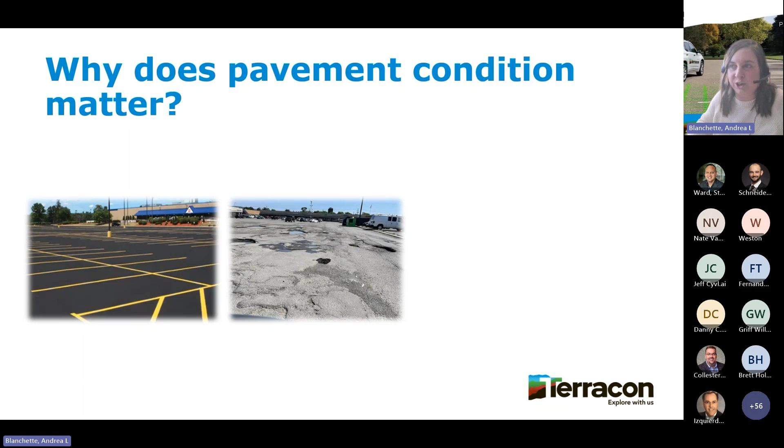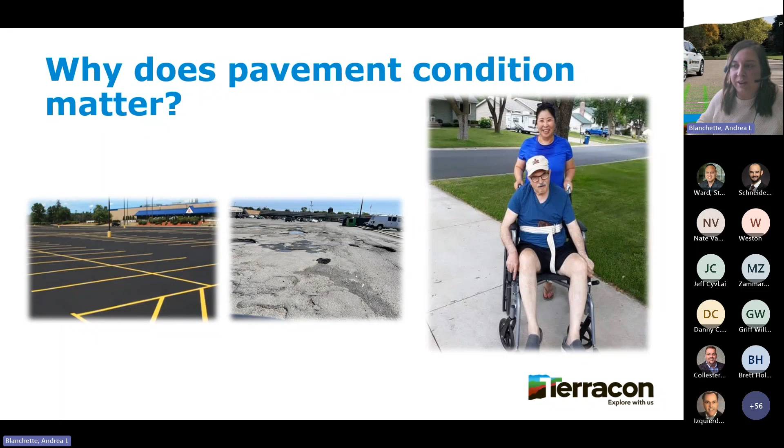So these potholes can have real life consequences. I'm not just making this up, but this can affect people's livelihood and ease of access to a site. So we want to eliminate that for users and make sure that the parking lots are performing and are safe for people using that. Pavement condition can also matter in terms of sustainability.

Can everyone hear me? I see someone lost the sound. I'll keep going unless someone... Steve, am I good? I can hear you. Okay.

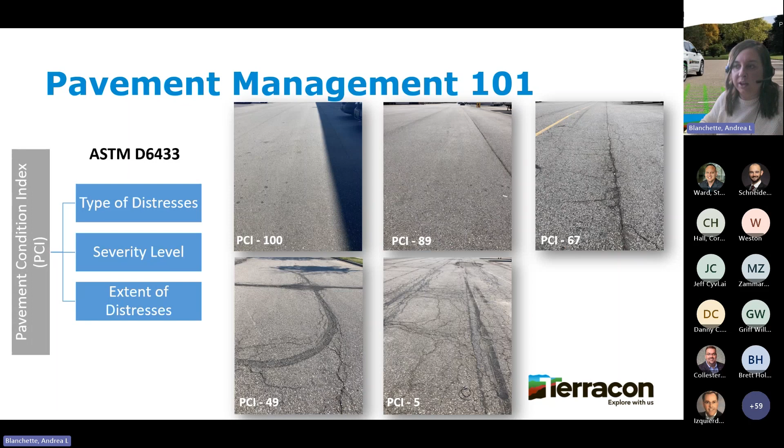And as facility managers, you can kind of use that guide to dictate where you're comfortable at. We have clients that set a high aesthetic standard and they want their PCIs maintained upwards of an 80. That's totally fine. That comes with a cost, right? So it costs more money to maintain at a higher overall PCI average, but maybe a 49 isn't realistic for you. You've got a lot of complaints from users, or there's a lot of risks or safety issues happening at a PCI that low. So you can really guide and set your average target value there and work to maintain your network at that level.

We use the PCI numerical data to attribute this to different types of maintenance. So gone are the days where it's just build a pavement, at year 15 mill and overlay, and then wait till you reconstruct it. There are a ton of tools in the toolbox for both concrete and asphalt pavements, whether it be surface treatments like microsurfacing, a fog seal, chip sealing, different reclamation, reconstruction of a pavement, full depth repair type work. So again, different states have different contractors that specialize in different processes, but there's a lot of options for repairing a pavement that can really save clients money.

Just for a quick example, something like a fog seal might be done in a really hot climate area like Phoenix. We don't do these a lot in the Midwest and Minnesota specifically.

Picture a brand new dark asphalt pavement, right? It's jet black and it bakes in the sun all day. A fog seal is a thin asphalt emulsion that is sprayed on the surface of the parking lot and prevents that top surface of the pavement from oxidizing and becoming brittle, which leads to little micro cracks that form, which is the gateway to water infiltration of the pavement, which leads to more robust cracking. I like to equate a fog seal to sunscreen. You put sunscreen on your skin so you don't bake out in the sun, similar to that application.

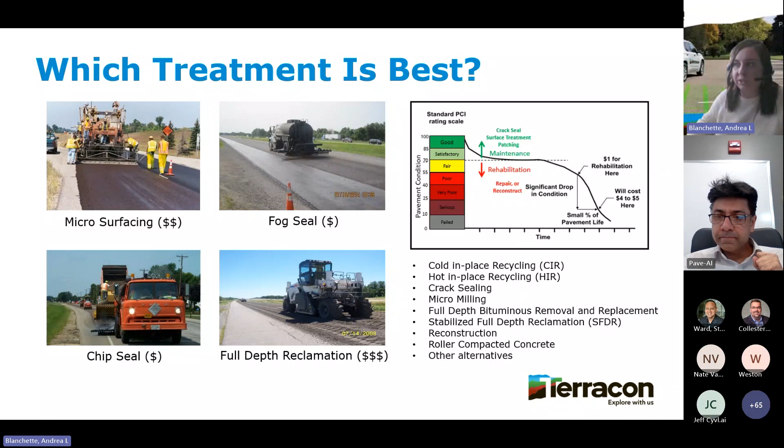So hopefully that's a quick summary on the data collection aspect. I mentioned that we used to do these manually. We'd send out a technician and collect all of this data. I'll welcome Amit to join me here, and we're going to transition into some of the technology we're using and show you the way we're using machine learning, AI, and video capture to do these pavement assessments. So to start, I'd like Amit to share his story and how his team got into working with pavements. Amit?

Thank you, Andrea. I am on the mic. Hopefully you can hear me, but my camera is not turning on, it seems like. I could see you, Amit. Regardless, right. Yep, go ahead. Okay, great. Well, thank you, everyone. Great to be able to be on this and appreciate your time.

My name is Amit. I am with Pave AI, and what I am hoping to do is talk a little bit about the technology, give you some of our background and how we came to be in this arena, and talk through some of the issues that we see. So starting off with our background, it might surprise you, but we are not geotechnical engineers. We are not PEs. We're actually a bunch of aerospace engineers who build satellites for DoD. We use a lot of AI for looking at geospatial imagery and doing detection on board the satellite. So the obvious question is, why are a bunch of guys building satellites all of a sudden looking at potholes and pavement cracks?

The reason this works really well is Terracon has a significant amount of domain expertise in everything related to pavement and other areas, and a lot of data. So what we are trying to do is complement that capability with new technology in areas that, to use the overused cliche, are ripe for disruption. So that's where this marriage has been made. And Andrea, if you go to the next slide, I can start to talk specifics.

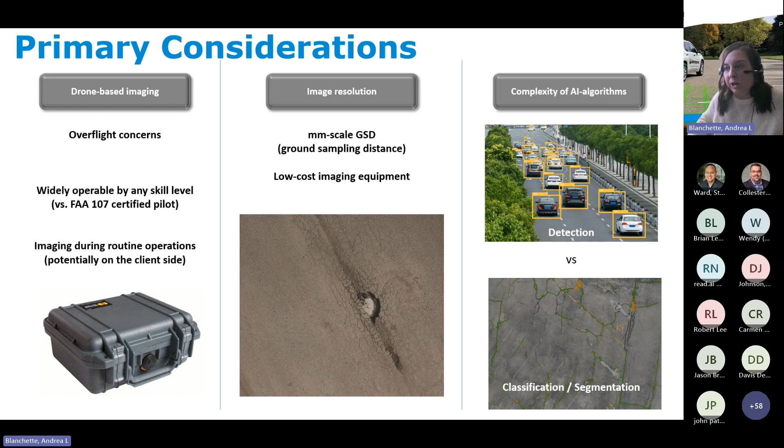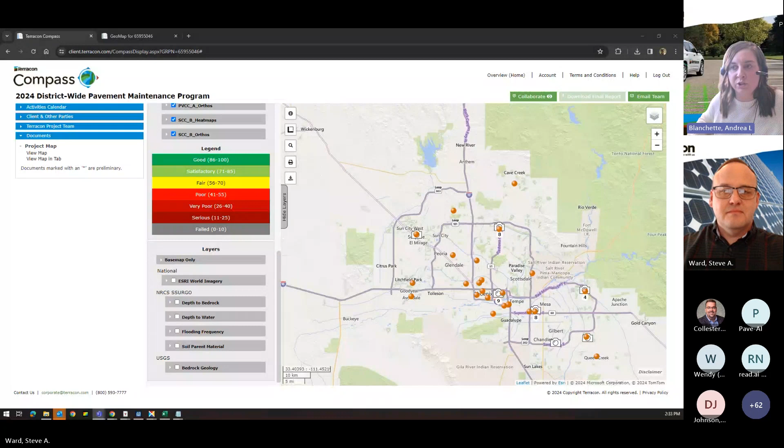I'm going to transition and welcome Steve to join me here. Steve is going to demo our Compass portal. This is how we've been delivering these PaveAI projects to our clients. It showcases the high resolution imagery as well as the PCI heat map that Amit was describing. So we definitely want to show you guys what this looks like.

The case study Steve is going to show is actually one of our longest serving clients. This is Maricopa Community College in Arizona. I just want to mention this is made up of 32 campuses, run by 16 different facility managers. It's 142 parking lots. It's about 16 million square feet of pavement that they manage.

So a lot of opinions with different facility managers and a huge amount of pavement that for over 25 years now, we've helped this client manage their pavements. And after Steve does this demo, I'll show you some of the reporting and results that we've got from them.

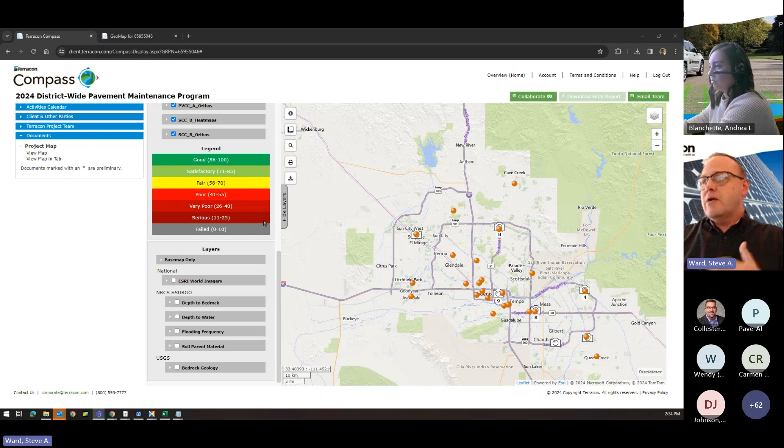This is a view of Compass, which is our digital delivery and consulting platform. So it's the same program that will deliver our geotechnical projects. You could see the borings underneath the surface or materials testing and see the compaction results and everything like that. So a powerful platform to see the project life cycle. But we're going to show you how we also deliver our digital products, such as PaveAI, in Compass.

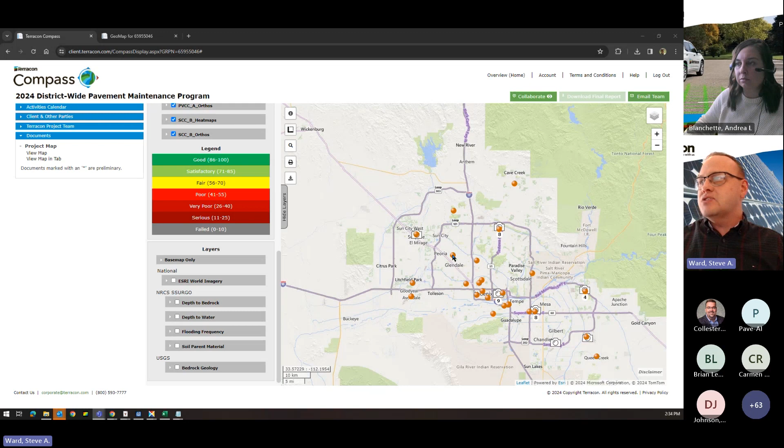This is a map of the various campuses for this client that Andrea mentioned, and I can just go ahead and zoom right in, or I could use the search and find a specific campus as well. But as I zoom in, you'll see that we start to see some map layers show up. And so that high resolution imagery that Amit was speaking of, that's gigabits of data, is presented through a web browser and lets you just zoom in and see bits of it at a time.

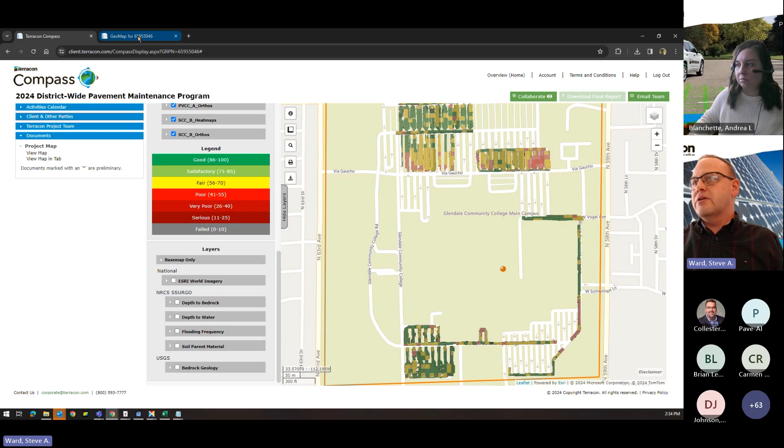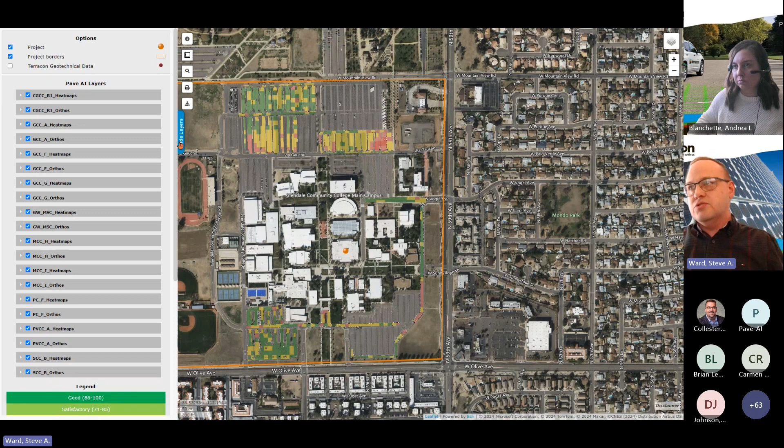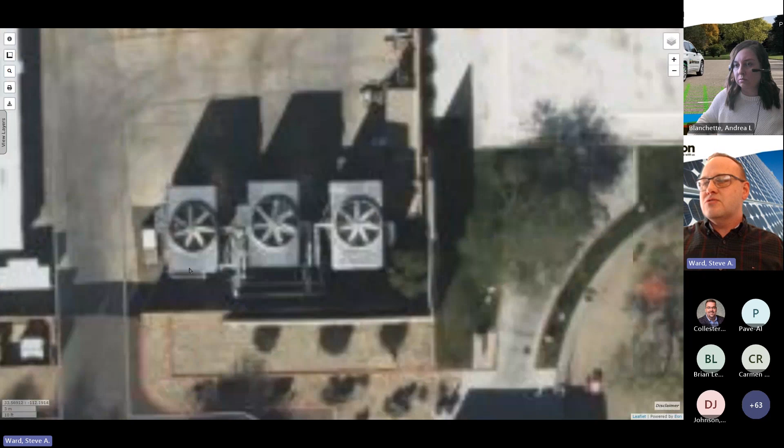You can click on view in a new tab and switch this over to aerial imagery and get a full screen. So I'm going to go ahead and do that now and show you a couple of things. One of the first things that Amit mentioned is the level of resolution that is needed to do this work. And to demonstrate this to you, I'm going to zoom in on these buildings, and you can see some air conditioning units here. As I zoom in to about this level, it starts to get blurry, and it's just going to get more blurry the more I zoom in.

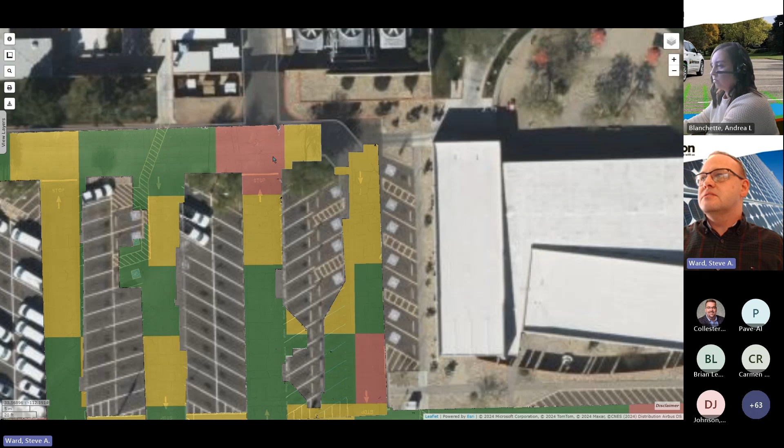However, where we have done the PaveAI imagery that you can see here with the color coding on it, you'll see as I zoom way in, we can get all the way down, and this will refresh here in a moment and show you that this is a sewer cover to access the area.

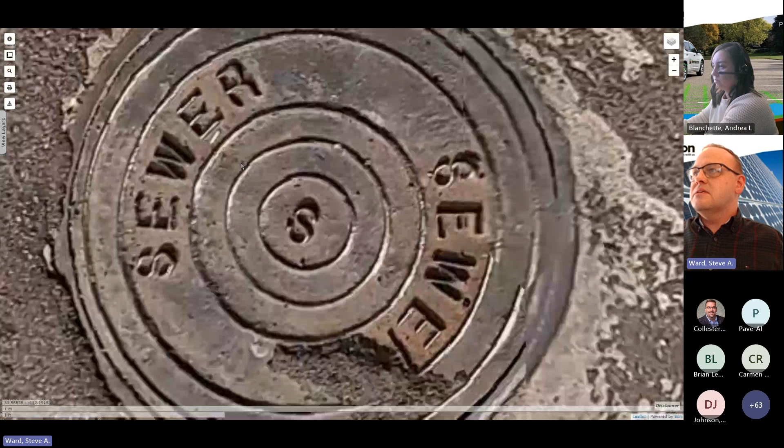You can see on the embossing the shadows from this as well. So that's how we're able to show this level of information, and Amit and his team are able to use this data and calculate through the AI those values based upon the flaws that are found. So I'm going to zoom back out here again and look at a larger area of the parking lot to kind of show you how the machine learning is calculating.

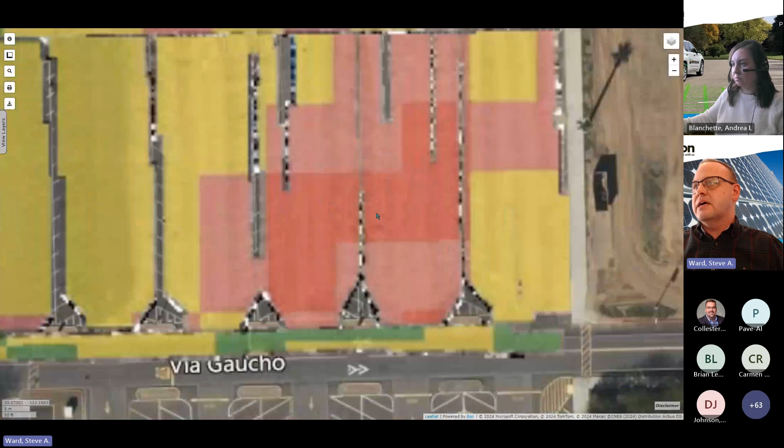And you can see the legend over here. If I zoom down in my options, it shows you those PCI rating scores anywhere from 0 up to 100 in the different categories. But I'll go ahead and go back to the imagery now and zoom in on a specific area on the site. And you'll see how the machine learning, the AI, has gone through and calculated areas of PCI scoring.

And you can see here, the darkest red is the most impacted area, the most fractured. And as you zoom in, you really see the sorts of cracking that's involved in this area, the sorts of degradation of the pavement that's there. Some areas just to the north of this that have a little bit less, but still more significant than areas over here that are less significant, and further between those cracks as we go through there.

So this is just our tool to allow our clients to come in and not only just get a report that says, here's the numbers, here's the acreage, here's the linear feet, or even here's the dollars, but visualization helps immensely, whether it is a project manager trying to make sure we are providing the best consulting for our clients, or whether it is you and your organization going to an internal team or a tax base to say, we need money to fix this. And not only here's just a report for you to see that, but here's the visualization. And you have a tool that gives you the power to do that as well.

As I mentioned, it's easy to find other sites available. So if we wanted to switch away and go to Gateway Community College, which is part of the same district, just do that, just click enter, and it's going to find the site and zoom in there to where we could start to see the pavements that are available on this site. So Andrea, that's it. Anything you wanted me to cover before I turn it back over to you?

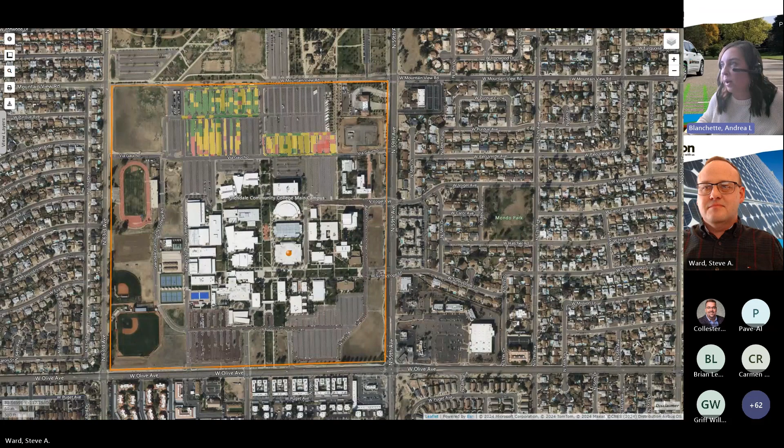Nope, I would just mention too, in the Compass portal, we have a lot of historical geotechnical data that clients can utilize, and layers of information, soil layers, and other known layers of information in there to help make these robust recommendations. I'm going to keep going on with the slides there. I'm addressing some questions, but can't get to them all right now, but we can come back to those at the end. So thank you, Steve, for sharing that demo with us.

There's operational cost. Are you having a lot of downtime? Are your fleet vehicles hitting potholes, breaking axles, and you've got issues in just keeping your facilities up and running and trucks coming in and out? Schools, we have a lot of schools on the call today. Your buses, can they get in and out of a site smoothly?

And then risk. I mentioned my dad falling. Is there a risk associated and a cost associated with that risk, or the threat of somebody suing you because you have some significant potholes or something on a site or one of the pavements that you manage? So think about the impact as we continue here.

I'm going to continue on this Maricopa Community College example and show you some of the raw data that we've obtained and summarized over the last 20 plus years of working with them. How did we save them money? How has this program impacted them? And so the graph I'm showing you here is our actual PCI value.

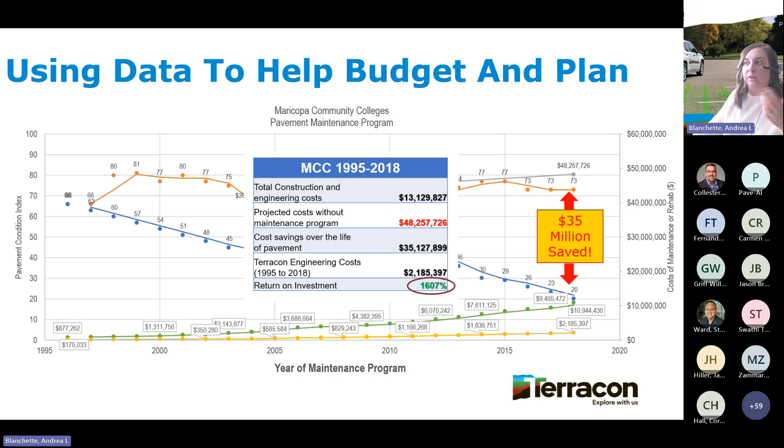And again, it's not just the dollar cost, right? It's the downtime and shutting down campus parking lots while you're reconstructing or doing some type of repair on these sites. With minimal, I'd say, crack sealing, microsurfacing, and patching, a consistent program like that, they've really kept their operations functional and saved themselves a lot of money while extending their pavement. So it's important to look at what could happen.

Maybe you're one of those facility managers that have pavements right now and everything's smooth sailing, not a care in the world. Everything's looking good, but pavements tend to age in one direction. And so if you're not dealing with this now, someday you will.

So this is a snippet of what our deliverable looks like. We put these 5-year maintenance plans together for clients. I pulled out just one subset of data here. This is Maricopa Community College campus parking lot, MCC. So they have different names for different campus parking lots. They have 142 parking lots. This MCC campus lot is 2.2 million square feet.

Within that parking lot, we broke this down into different sections. So there's section A, B, C, all the way through V. They're not quite in alphabetical order, but you can see the PCI score of each section. So in 2023, section A was rated a 57. And what you see here, this is input into our asset management program.

So we say, based on the distresses that exist today, how would you predict that pavement to degrade over time? So we predict that in 2024, it'll be a 56. In 2025, you see it drops to a 54, then a 52, and a 51. So what catches my eye and what we're looking for there are gaps in color change. What is my window to do some type of preservation treatment before the distresses get so bad that we're only left with the option to reconstruct or do a full depth repair?

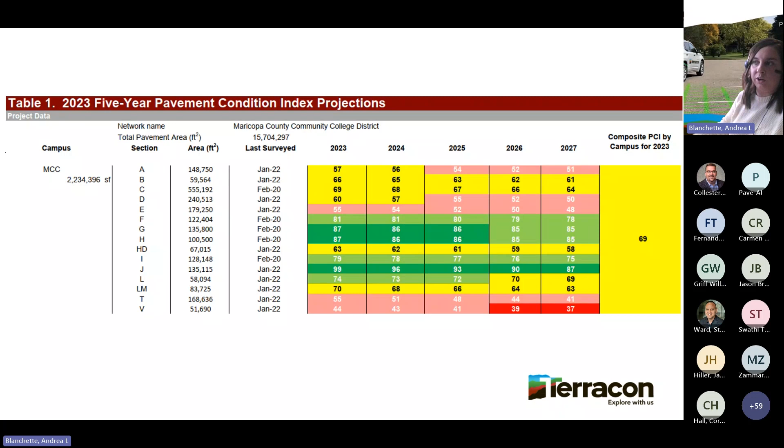So Jennifer, who manages our projects on the West Coast, did this project, and she came back with this repair plan. So she said, on certain sections, section A, D, E, et cetera, T, V, in 2023, we recommend you do some preservation, preventative maintenance, crack sealing, patching, maybe a micro surfacing, and then here she had a preventative maintenance project in 2025. So you see, not everything is pulled for repair, not everything needs it.

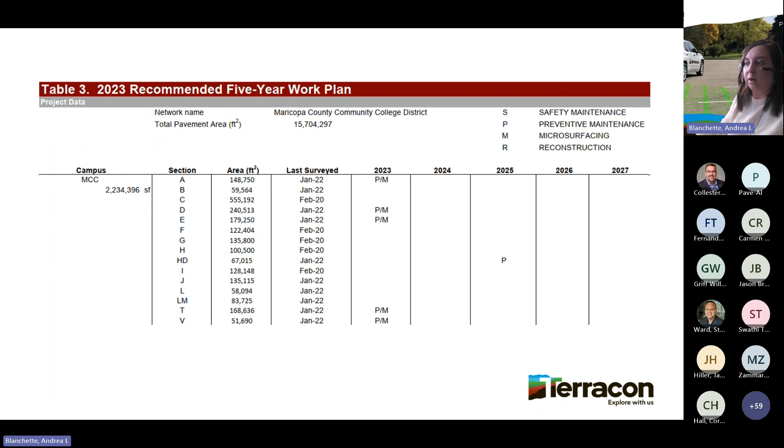And clients have limited dollars. You can't possibly do everything. So we say, what would give you the most bang for your buck and how best to spend your dollars. Based on our relationships with contractors and known pricing, we help put together estimated unit costs for this. So this gives you a sense of what you need to budget and plan. A lot of clients need to go up the chain and get funding designated for this type of repair work. So we can say, looking out 5 years, how much money are we going to need annually for pavement specific repair work?

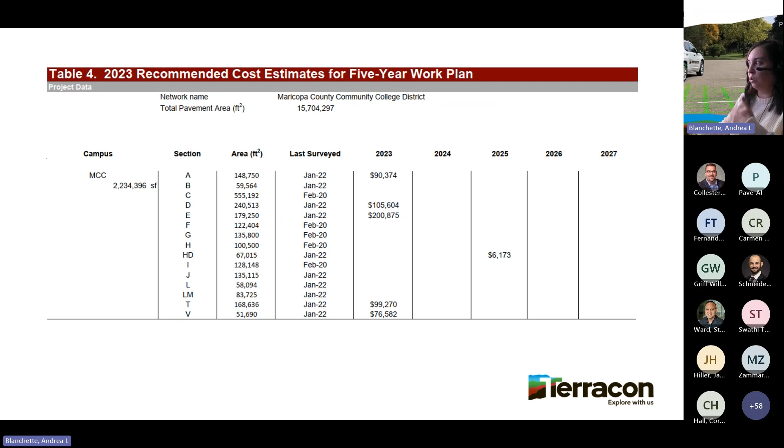So just to get into the weeds a little bit, you see we had estimated that crack sealing patching project on section A, we're going to need about $90,000. This is a really small subset of these 140 parking lots. There's a lot of data, but I just wanted to zoom in on one here. So let's just focus on section A there, a $90,000 project. We further divide that, 38,000 of that is really going to be a crack sealing effort. 52,000 of that, we're going to do some type of micro surfacing. You see that total there, the $90,000.

And I just wanted to share on this slide, we hear a lot from clients about the way they pick what work to be done. They're very reactionary, as Bill was saying. We had a logistics client that managed the 140 parking lots I was explaining earlier, and we asked him, how are you picking what maintenance needs to be done? And this was his quote: whoever complains the most gets the work. So they'd have a handful of facility managers that would call up every year and say, our parking lot is falling apart, we need more money out here.

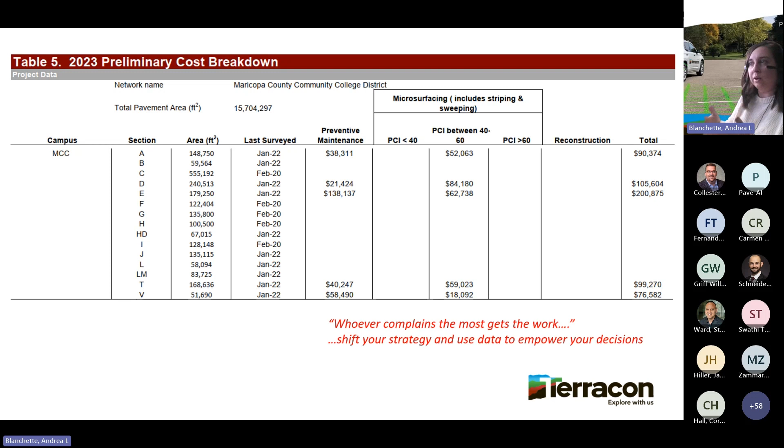And when we assessed all 140 parking lots, what we found was there were 20 or 30 parking lots in far more dire need for money and maintenance than these same people that were complaining and getting all the funding. And unfortunately, that's a bit of a waste of money when you're spending money on pavements that haven't quite reached the point that they need repair work. You want to optimize where your dollars are going to spend that money wisely.

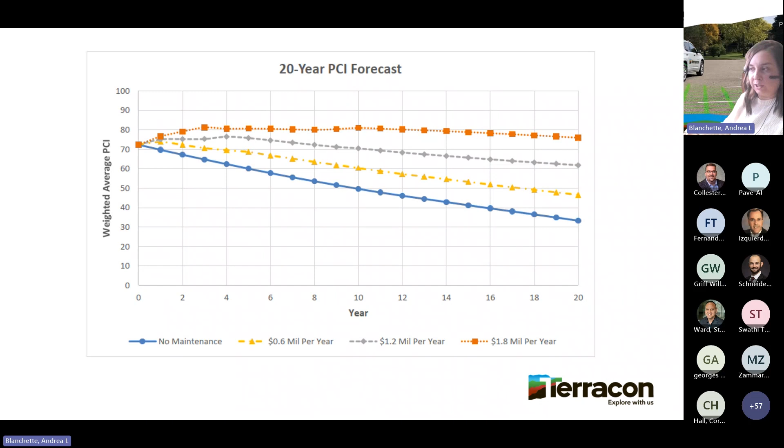I had a client that wanted to maintain at an 80, and they were currently spending $200,000 to $300,000 a year on preventative maintenance. Their whole network was built in about 1980, so they were just hitting their intended design life. And when we ran the scenario, we showed that they should be spending almost $2 million a year. Well, that's quite a big leap to get from a couple $100,000 to $2 million. But the point is, having the data allows you to start thinking towards that and start planning for that cost.

So in closing here, think about what would it look like for you to not have to worry about your pavements. We are really good at this, not to toot our own horn here, but we have worked with clients in any spectrum from logistics to school districts.

We're working with a large religious organization now that's, I think we're doing about 100 reports for them across the country, down to anything from somebody that manages a single parking lot. So we have the expertise.